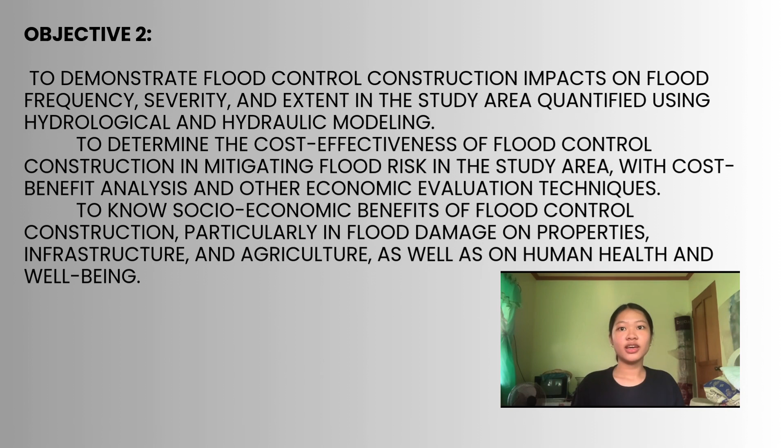using hydrological and hydraulic modeling, to determine the cost effectiveness of flood control construction in mitigating flood risk in the study area with cost-benefit analysis and other economic evaluation techniques, to know socioeconomic benefits of flood control construction, particularly in flood damage on properties, infrastructure, and agriculture, as well as on human health and well-being.

The objective 3 is to explore community perception and satisfaction with existing flood control measures through surveys, interviews, and focus groups. Measurements of water flow and volume. Flow rate: measuring the volume of water flowing through a flood control system over time, in cubic meters per second. is essential to assess the effectiveness of flood control, instruments like flow meters or gauging stations can be used to collect data.

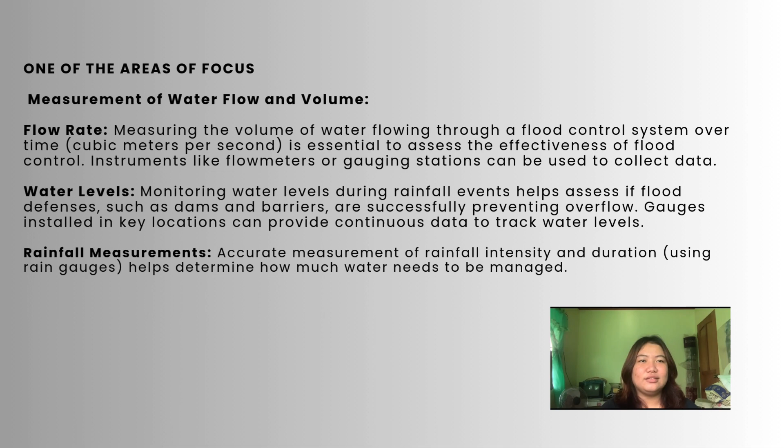Water level. Monitoring water levels during rainfall events helps assess if flood defenses, such as dams and barriers, are successfully preventing overflow. Gauges installed in key locations can provide continuous data to track water levels. Rainfall measurements. Accurate measurements of rainfall intensity and duration using rain gauges help determine how much water needs to be managed.

Data collection. First, collect the relevant data regarding flood events before and after the construction of flood infrastructure. Data might include flood frequency, flood depth, economic losses, infrastructure damage. Flood frequency, the number of flood events per year before and after the construction. Flood depth, the average depth of flood water before and after the construction. Economic losses, the estimated economic losses, for example, damage to homes, crops, infrastructure before and after construction. Infrastructure damage, the estimated cost to repair infrastructure before and after the control measures were implemented.

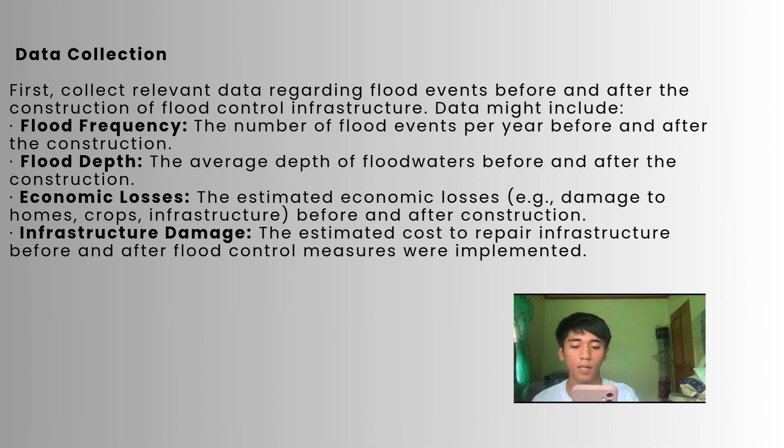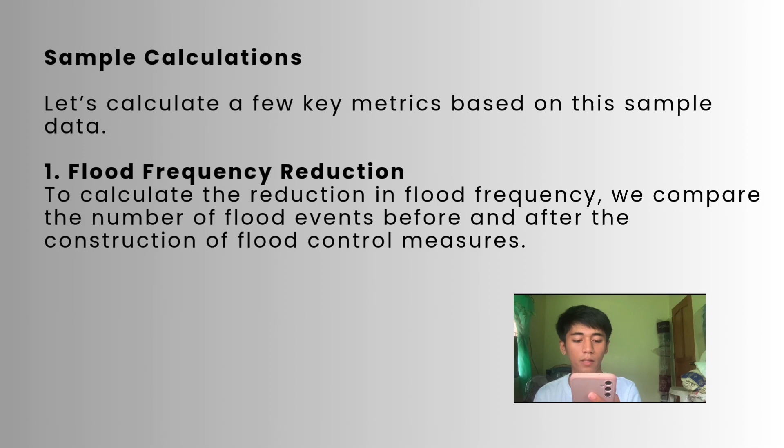Here's the sample of data. Sample calculation. Let's calculate a few key metrics based on the sample data. Flood frequency reduction. To calculate the reduction in flood frequency, we compare the number of flood events before and after the construction of flood control measures. Example of calculation. To calculate the average floods before construction, 5 plus 6 plus 4 divided by 3 is equivalent to 5 floods per year. To calculate the average floods after the construction, 2 plus 2 plus 1 divided by 3 is equivalent to 1.67 floods per year. Flood frequency reduction percentage: 5 minus 1.67 divided by 5 times 100 is equivalent to 66.6%. The flood frequency has reduced by 66.6% after the construction of flood control infrastructure.

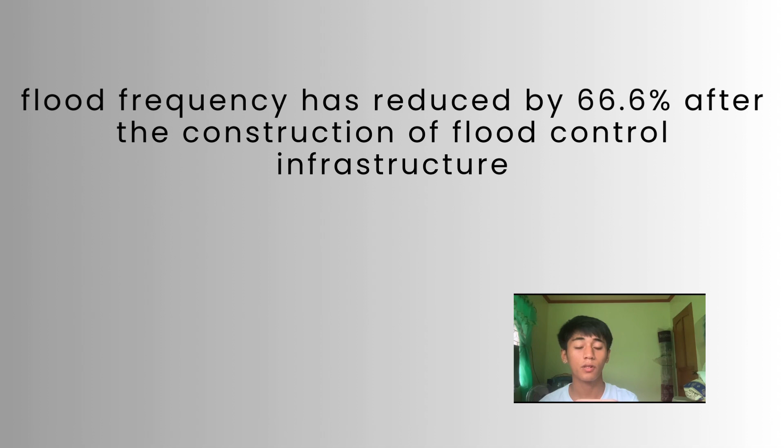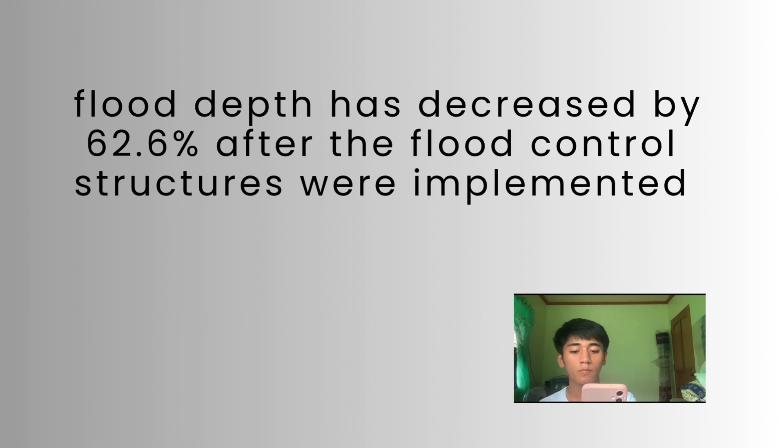Depth reduction. Flood depth is another important metric that shows the amount of water during flood events affecting both residential and agricultural areas. Example of calculation. To calculate the average depth before construction, 1.8 plus 2 plus 1.5 divided by 3 is equivalent to 1.77 meters. To calculate the average depth after construction, 0.7 plus 0.8 plus 0.5 divided by 3 is equivalent to 0.67 meters. Flood depth reduction percentage is 1.77 minus 0.67 divided by 1.77 times 100, equivalent to 62.6%. Therefore, flood depth has decreased by 62.6% after the flood control structures were implemented.

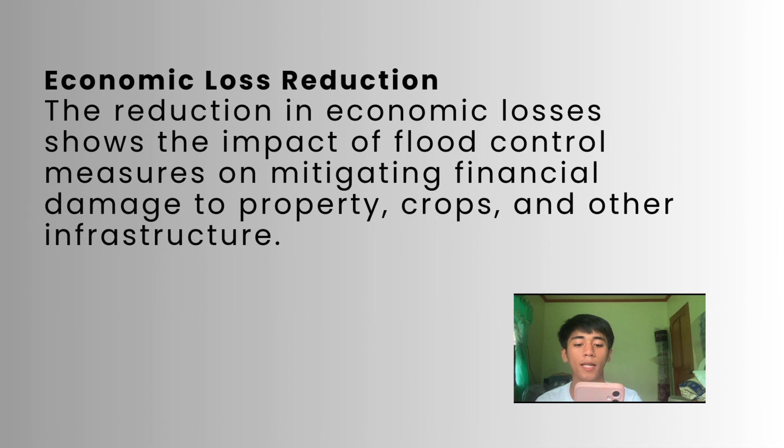Economic loss reduction. The reduction in economic losses shows the impact of flood control measures on mitigating financial damage to property, crops, and other infrastructure. Example of calculation. To calculate the average losses before construction, 4.5 million plus 5 million plus 3.5 million divided by 3 is equivalent to 4,333,333 pesos. To compute the average losses after construction, 1.5 million plus 2 million plus 1 million divided by 3 is equivalent to 1.5 million pesos.

Economic loss reduction percentage is equivalent to 4,333,333 minus 1.5 million divided by 4,333,333 times 100, equivalent to 65.3%. Therefore, the flood control measures have led to a 65.3% reduction in economic losses due to flooding. Infrastructure damage reduction percentage: 2.5 million minus 500,000 divided by 2.5 million times 100 is equivalent to 80%. Therefore, 80% of infrastructure damage has been prevented by the flood control construction.

Data analysis and interpretation. With the calculation above, the data analysis would focus on the following interpretation. Flood frequency has decreased by 66.6%, indicating a significant reduction in the number of flood events. Flood depth has reduced by 62.6%, suggesting that floodwaters no longer reach the same levels as they did before the flood control structures were put in place. Economic losses have dropped by 65.3%, demonstrating that less financial damage is occurring due to reduced flooding.

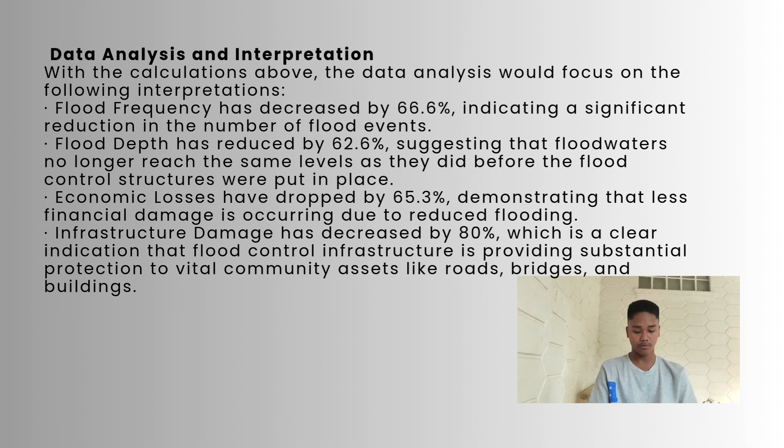Infrastructure damage has decreased by 80%, which is a clear indication that flood control infrastructure is providing substantial protection to vital community assets like roads, bridges, and buildings. These results clearly indicate that the flood control construction in Macabog, Sorsogon City has been highly effective in mitigating flood risk and reducing flood frequency.

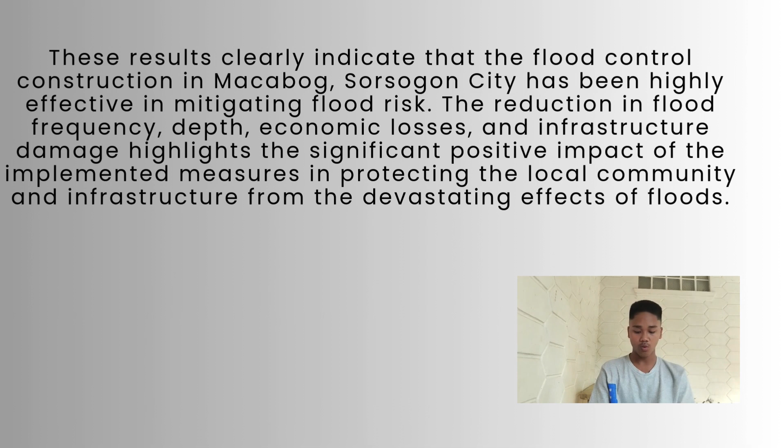That economic losses and infrastructure damage highlights the significant positive impact of implemented measures in protecting the local community and infrastructure from the devastating effects of floods. Real-world performance data in evaluating the effectiveness of flood control system in Macabog, Sorsogon City.

1. Flood frequency and severity data. Flood frequency and severity data are essential to assessing how often and how severe the floods are after construction of flood control infrastructure. Comparing pre-construction flood events with post-construction events allows for direct measurement of the system effectiveness. The data points to collect. Frequency of floods: the number of flood events in a given time period before and after the installation of flood control measures, annually and seasonally.

Flood depth: the highest water level during the flood events measured in meters or centimeters. Flood duration: the length of time water remains above a certain level, indicating how long the area remains affected by flood. Source of data. Local meteorological and hydrological agencies: data on rainfall patterns, river levels, and flood events. Automated sensors: data from installed flood gauges that monitor water level and fluctuations in real time.

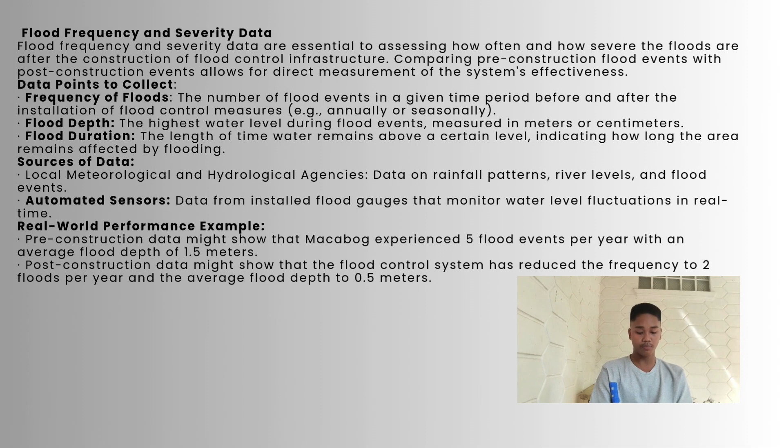Real-world performance example. Pre-construction data might show that Macabog experienced 5 flood events per year with an average flood depth of 1.5 meters. Post-construction data might show that the flood control system has reduced the frequency to 2 floods per year and the average flood depth to 0.5 meters.

Flood damage and economic losses. Tracking economic losses and property damage during flood events before and after implementation of flood control systems is a direct way to measure the effectiveness in reducing the financial impact of floods. Data points to collect. Property damage: estimated cost of damage to residential, commercial, and agricultural properties due to flooding, in local currency.

Business interruption: the length of time businesses are unable to operate due to flood events, leading to economic losses. Agricultural losses: data on the crops and livestock lost during floods. Sources of data. Insurance claim data: information from insurance companies and claims related to the flood damage. Municipal records: local government data on reported damage and economic losses during flood events.

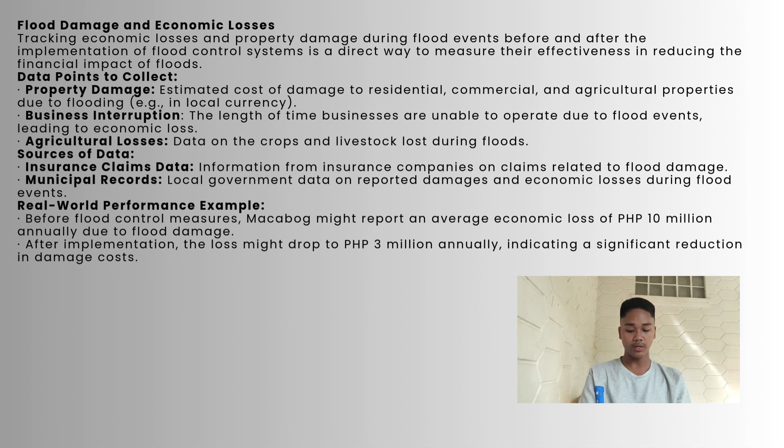Real-world performance example. Before flood control measures, Macabog might report average economic losses of 10 million pesos annually due to flood damage. After implementation, the losses might drop to 3 million pesos annually, indicating a significant reduction in damage cost.

Water quality and erosion data. Flood events can carry contaminants and debris into local water bodies, affecting water quality. Data on water quality before and after the implementation of the flood control system can show how well the infrastructure reduces pollution and erosion. Data points to collect. Water quality parameters: measures of turbidity, pH, dissolved oxygen, and contaminants such as bacteria or industrial pollutants. Soil erosion: the amount of soil loss due to flooding, measured in cubic meters or tons per square meter.

Source of data. Environmental monitoring agencies: local agencies or NGOs that monitor water quality and conduct regular water testing in rivers or lakes. Soil erosion studies: data collected from field studies or remote sensing to monitor soil erosion over time.

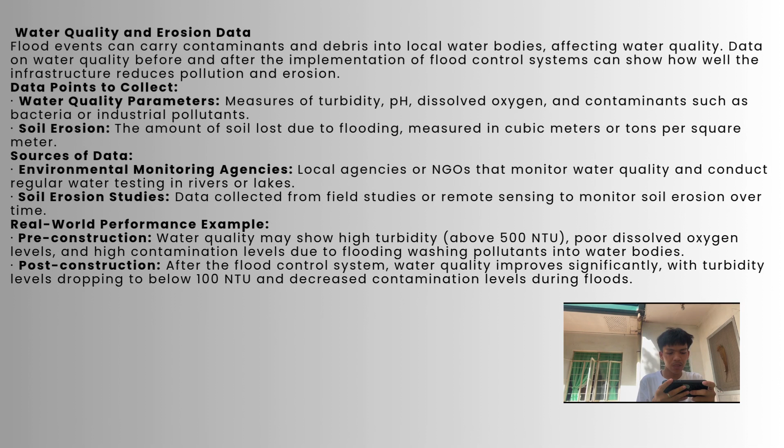Real-world performance example. Pre-construction: water quality may show high turbidity above 500 NTU, poor dissolved oxygen levels, and high contamination levels due to flooding washing pollutants into water bodies. Post-construction: after the flood control system, water quality improved significantly, with turbidity levels dropping to below 100 NTU and decreased contamination levels during floods.

Flood forecasting early warning system. Flood forecasting and early warning systems, EWS, provide real-time data on impending flood events, allowing authorities and residents to take timely action and reduce the impact of floods. Optimizing strategy: real-time flood monitoring and automated early warning system. How it works: flood forecasting systems use weather data, river gauges, and satellite imagery to predict flooding events days in advance.

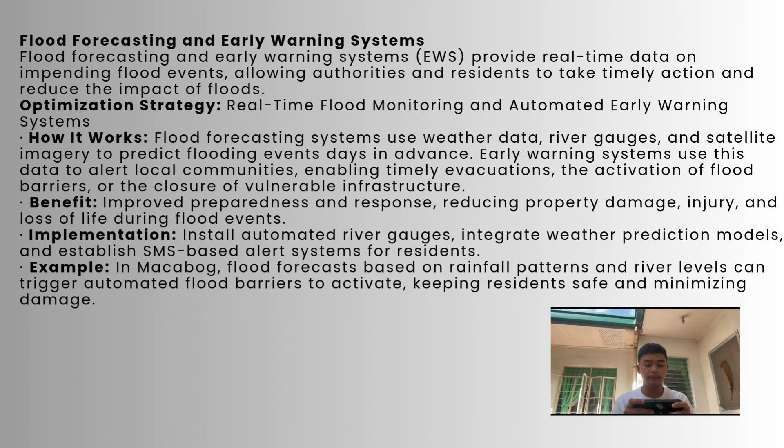Early warning systems use this data to alert local communities, enabling timely evacuation, the activation of flood barriers, or the closure of vulnerable infrastructure. Benefit: improved preparedness and response, reducing property damage, injury, and loss of life during flood events. Implementation: install automated river gauges, integrate weather prediction models, and establish an SMS-based alert system for residents. Example: in Macabog, flood forecasts based on rainfall patterns and river levels can trigger automated flood barriers to activate, keeping residents safe and minimizing damage.

Flood control system integration and interoperability. The effectiveness of flood control infrastructure can be enhanced by ensuring interoperability between various components such as dams, drainage systems, flood barriers, and river systems. Optimizing strategy: integrated flood management, or IFM, approach. How it works: the integrated flood management approach focuses on managing all aspects of flood control within a river basin, ensuring that all components work together to reduce flood risk. Second, benefit: a coordinated approach minimizes redundancies, enhances system resilience, and ensures more effective flood management.

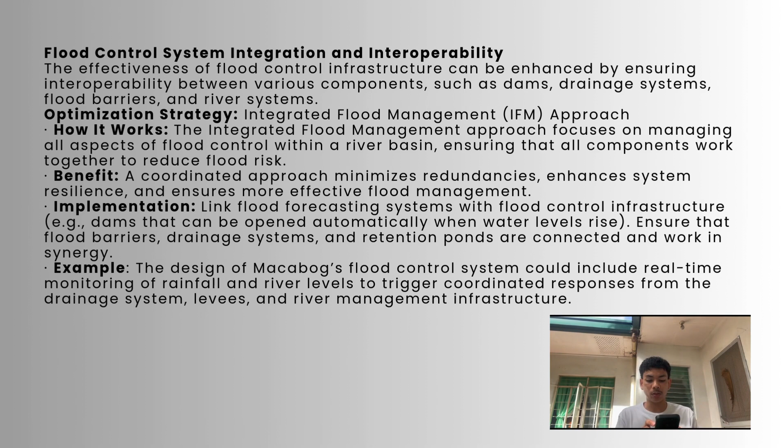3. Implementation: link flood forecasting systems with flood control infrastructure that can be opened automatically when water levels rise. Ensure the flood barriers, drainage systems, and retention ponds are connected and work in synergy. Example: the design of the Macabog flood control system could include real-time monitoring of rainfall and river levels to trigger coordinated responses from the drainage system, levees, and river management infrastructure.

Conclusion: the implementation of optimization strategies for the flood control system in Macabog, Sorsogon City can significantly improve the performance and resilience of the region's flood mitigation measures. By integrating advanced technologies, sustainable practices, and community engagement, these strategies can enhance the effectiveness of flood control infrastructure, reduce risk, and protect local communities from future flood events. Optimization is an ongoing process that requires continuous monitoring, adaptation, and improvement based on real-world data and emerging challenges.